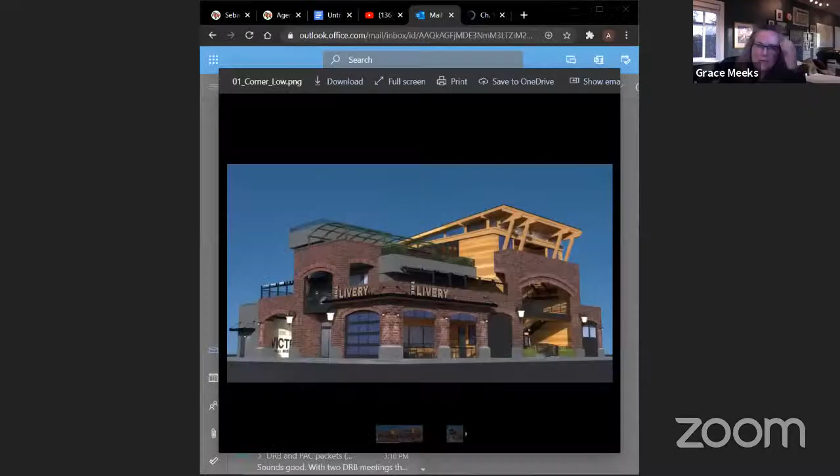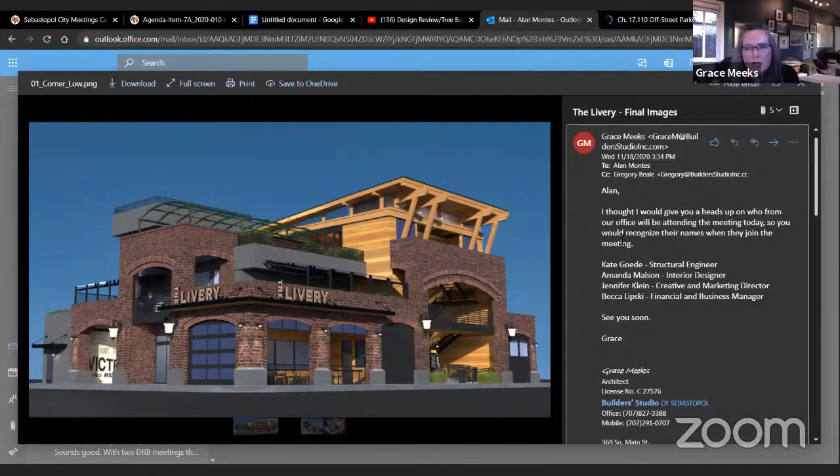Even Alan referred to it in his report. The existing massing, as you know, is kind of horizontal and stagnant, and we really feel like what we've done is create a little more movement to it. We pull it upwards. With the brick, it moves up. With the very low slope, but sloped roof, we create a more dynamic building, something we feel is much more appealing. We feel like this redesign really integrates our new features and the existing features better than our last design.

You talked about entries, and we feel like we've really created identifiable entries. Our areas, the brick that moves up, that's identifying the entry. We feel like it really will invite people in.

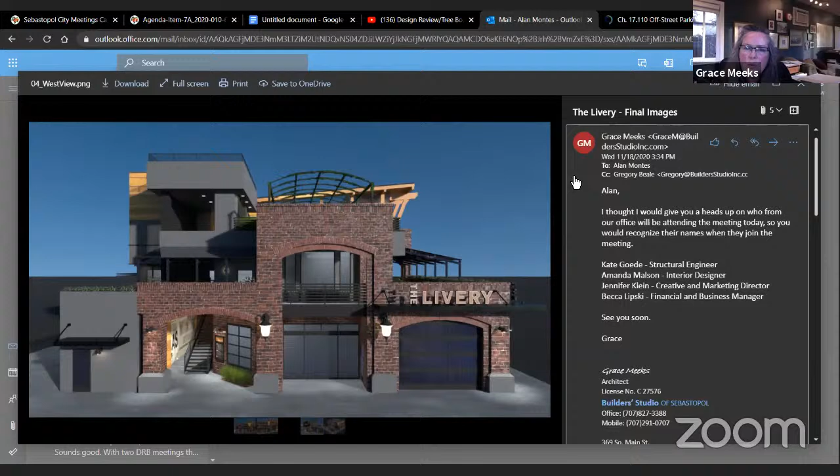You mentioned this corner, and we did not put our entries on the corner. We really feel that corner of this particular building can be very useful as community space, so people walking by will look into this porch area. They'll be able to see the people inside in the activity, and the people inside will be able to look out at the community and see it. But what we do feel strongly about is that this building creates a really strong corner and foundation for the block and for the city.

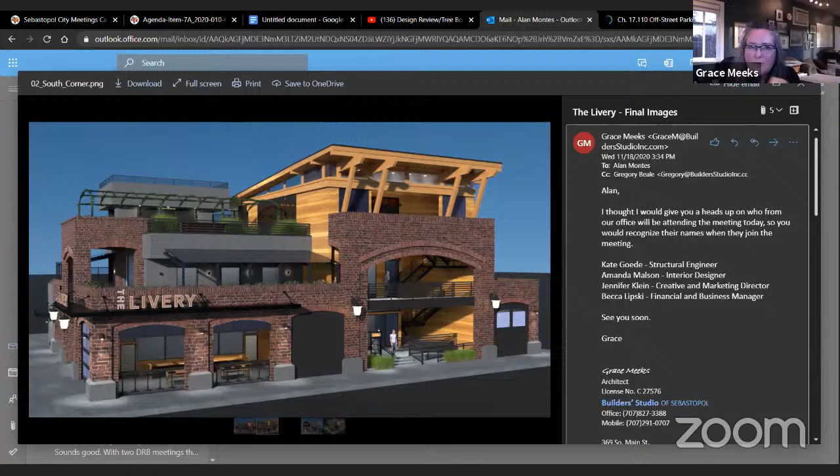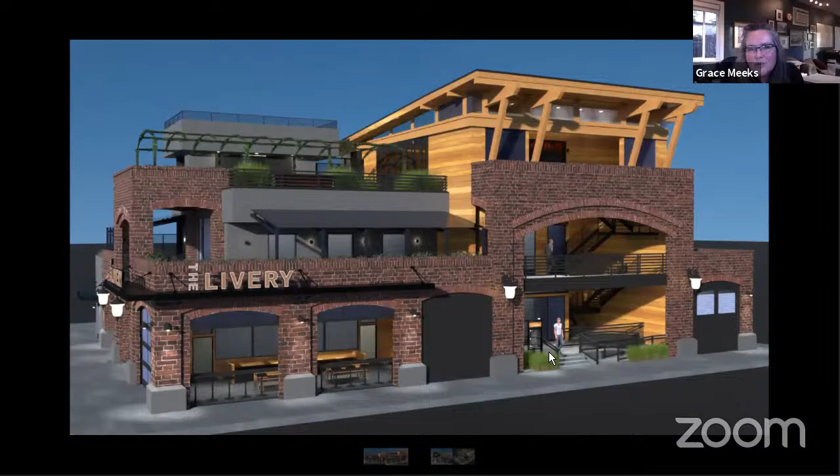Now we feel like we've done a blending of the past and the present and the future. As Alan said, and as you saw in your drawings, we uncovered this photo from the late 1800s of this original building, and it really became an inspiration for us. As you know, because of the name of the building and the floor names, it really was an inspiration for our marketing team as well, and it helped us develop the two together.

So our height that has resulted from all of these configurations, the third floor, this tower change, we have a wider entry. We've also put a very low clearance between our existing structure and our new structure. On the drawings you saw that in the sections. We gave you a sheet, I think it was A6.2, that clearly defined what was keeping us. So we've got our existing structure, our new structure over it, and we've kept a very minimal distance there.

And then if you move to the front where our elevator clearance, the shaft clearance, the height on that third floor is, our structure is just above that. We feel our structure is important for the feature and the feel of the building. So we feel we have successfully kept this project within the height adjustments allowed.

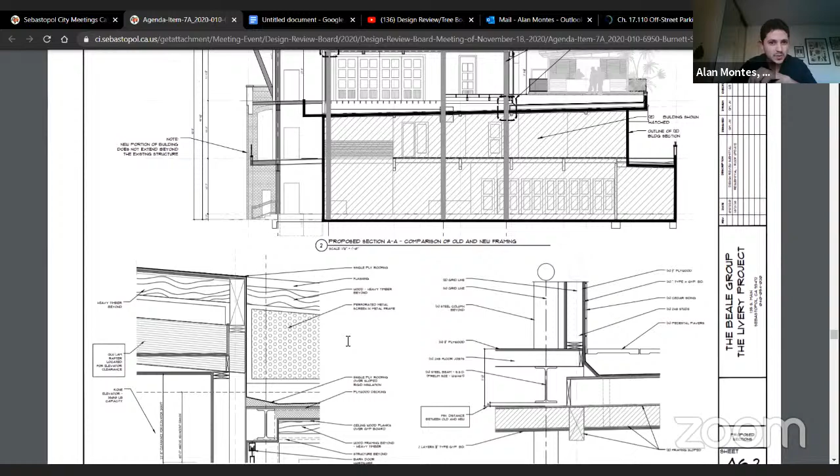Thank you, Alan. Are you hearing everything? Yeah, thank you. And it's number 3 that you wanted, or is it number 2? I can zoom in a bit. This is the page that offers some information.

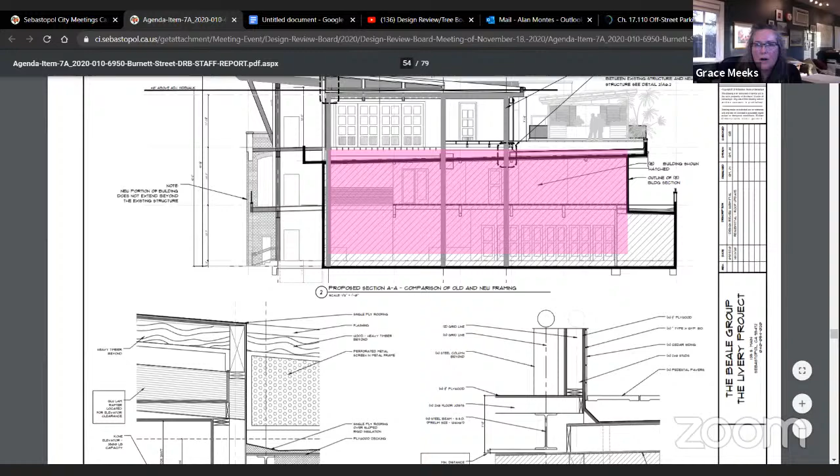We've got our existing right here, and this is the point where we are. This is that first point where our new and old structure kind of hit, and that's the detail that's below. The detail right in here is that detail. We've kept it very minimal on how close we are.

We had our structural engineer, she's here with us, go through a scenario and do some sizing for us. These are not final numbers as far as final sizing of our structure, because we've got a long way to go before the building permit, but we did get some preliminary sizing, so that's what this represents. On the left side you see our maximum height is 13.8 for our clearance, and we have this glulam tying in right above that. So that's kind of the components that set our building height.

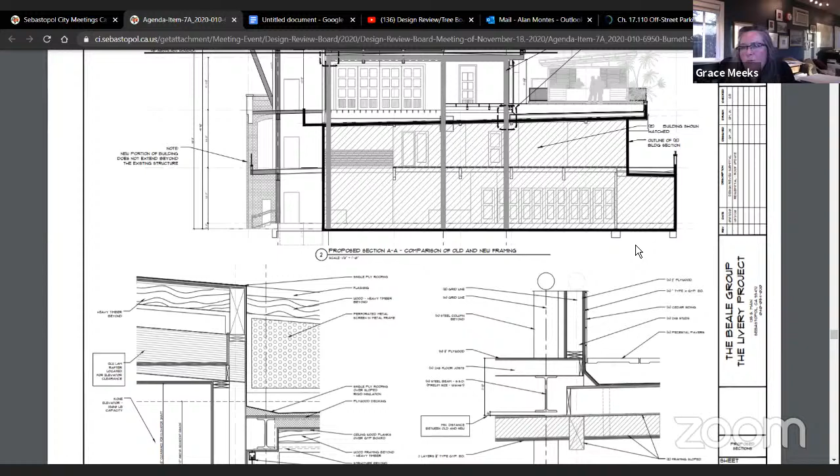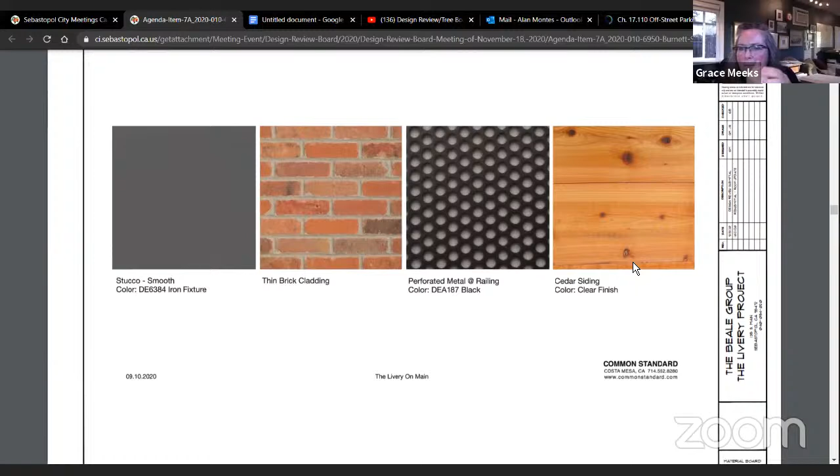Let me move on now real quickly to the materials and colors. Again Alan's mentioned all this, but I wanted to note, we heard you before at the beginning when you talked about how our stucco, we had a dark color, and it was on the base floor of the original one, and it was not right. That was our primary focus, and we totally understand. So we still have the stucco, and we still are using a dark color, but in this design it is very intentionally in the background.

So these are the images that were in progress, and the other images you received were the more final documents, the final images. But what we're now doing is using the stucco as the background, and it's the background for the other two materials, the cedar and the brick, which are much more textural and stand out.

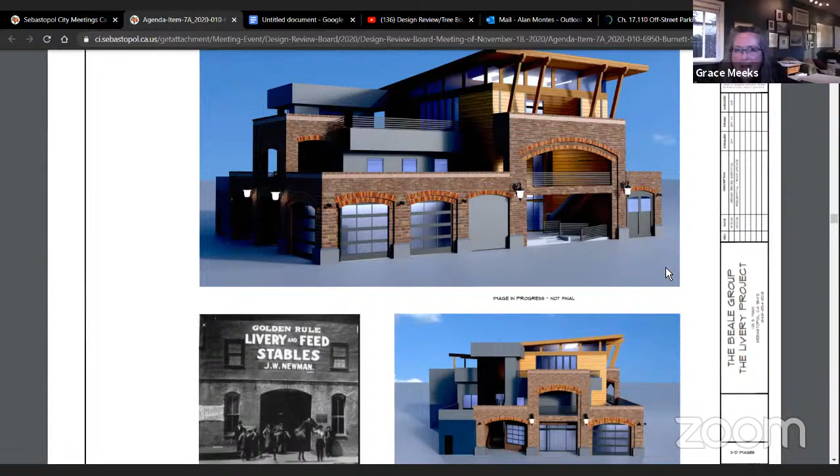So our brick, we feel, pays homage to the past and creates a really strong base. Our cedar siding is a mixed grain Western red cedar, and as you can see in these images, there's going to be some variation in the cedar, but nothing like what we showed before, which was mixed species and mixed size. This should be a lot more consistent, but still have that warm, inviting feeling.

As you see, the cedar comes down to the first floor, and the brick starts to move up. So as I said earlier, it's integrated — we feel like the materials are integrated. That's really all I was going to address.

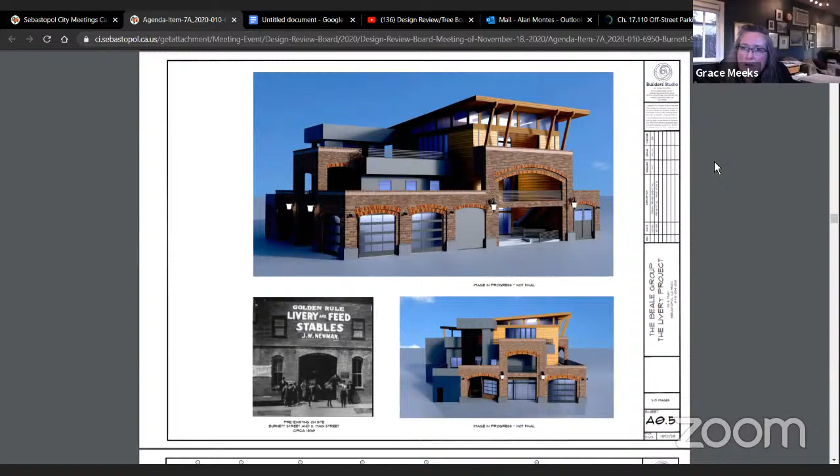The other things I wanted to clarify were our supplemental packages. You'll see on the other 3D drawings we sent that we have some of the signage shown that we are proposing, but that's for a later time as far as your comments go. Though I think you mentioned you might give us some pre-comments now, which would be great.

And the landscape on the 3D model — we're trying to just show you a sense of where it is, but we also feel like the building stands on its own.

The other thing I wanted to say before I end is that, although it wasn't mentioned, in the report there were comments about live entertainment. We just want to make sure you understand the success of this building is not dependent on live entertainment.

So with that, I don't have any other comments right now. I look forward to your comments, and we are all here to help answer questions if you have any. Thank you. Sounds good, thank you very much.

Any questions of our applicant?

I've got a few questions. I also just texted Christine, and she's going to join us in a couple minutes. Oh, sounds good — racing back to her office. Yeah.

I have a couple questions, a variety of them. In your brief, you talked about a former very successful business on this site. Is that the livery, or is there something more current you're referring to? I don't think of that building as having had a successful feel in the almost 20 years I've been here, so I was just curious what that was.

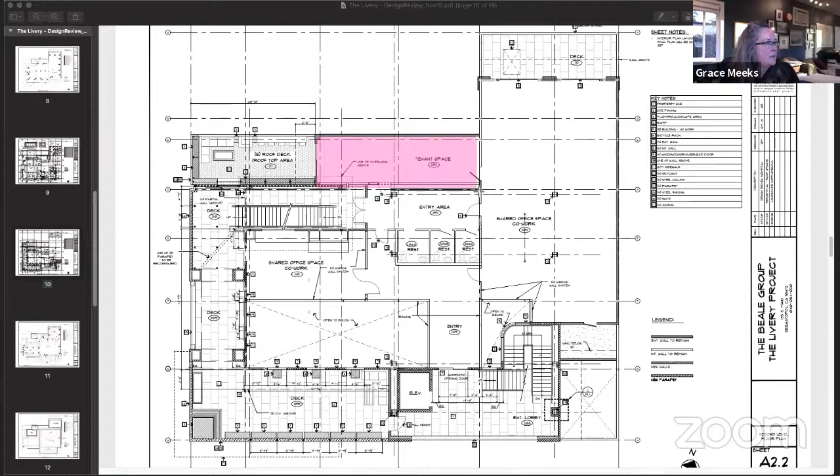And then on the top floor — let me clear this out and show you what we have up there. We anticipate that this area on the third floor will be kind of like a banquet hall that's part of a restaurant, or like when restaurants have large rooms — this would be it. It just happens to be upstairs.

And what we're showing is this small area here, which is kind of a makeshift bar area that could serve beverages, whether alcoholic or not. It's that kind of type — so there's not a lot of bar service, but that type of thing will probably be part of this. Sure.

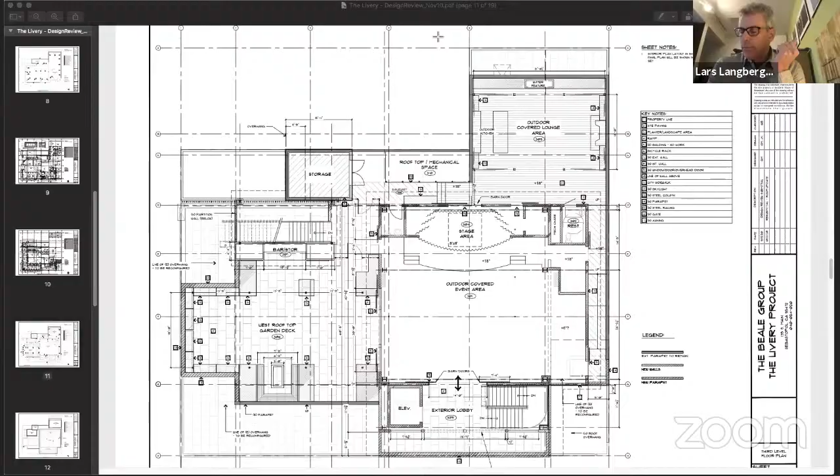Let me stop sharing. Did that answer your questions, Lars? Sure, that's fine. I'm just trying to understand some of the language you're using throughout the building programmatically.

So then you have a co-working space proposed upstairs. Is that like I would sign up for a certain amount of hours a month and go plug in? It's not for someone to just walk in with their coffee and sit down and work, or what's your sense of that? I'm going to let Jen or Becca take that question, to give a sense of what that might look like. Yeah, I could take that question.

Hi, my name is Jennifer Klein. The co-work would be a variety of options, anywhere from a monthly membership with dedicated desks for people to show up every day and work as an office, to day passes. Maybe somebody who buys food at the food hall can go up and use the co-work for a couple hours. So it'll be a variation from day passes to monthly passes to maybe permanent. And also the food related vendors throughout the building would be using that as their office space.

And the outdoor areas would be open to the public. Someone could get a cup of coffee downstairs and then come up to the outdoor patio on the second or third floor during the day. So is that completely public space? Could I walk in there, not buy anything from your food vendors, and go up to a deck just to enjoy the view? As of right now, yes, that's the current plan. We want it to be accessible for the community.

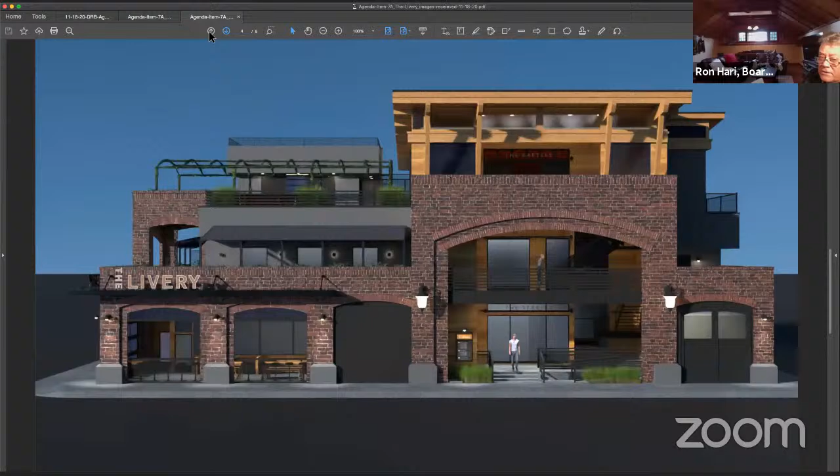The other question I have is on the other end of the building, in the corner next to the UPS building - what is that? Yes, in the corner, that is the UPS building. Is that got anything to do with you then? So that building is part of this property. The only thing we're going to do - and I apologize, we're not showing the windows - the windows and the door will stay exactly the same on the UPS building. We will paint it to match the colors and work with this, and we're going to update the awning.

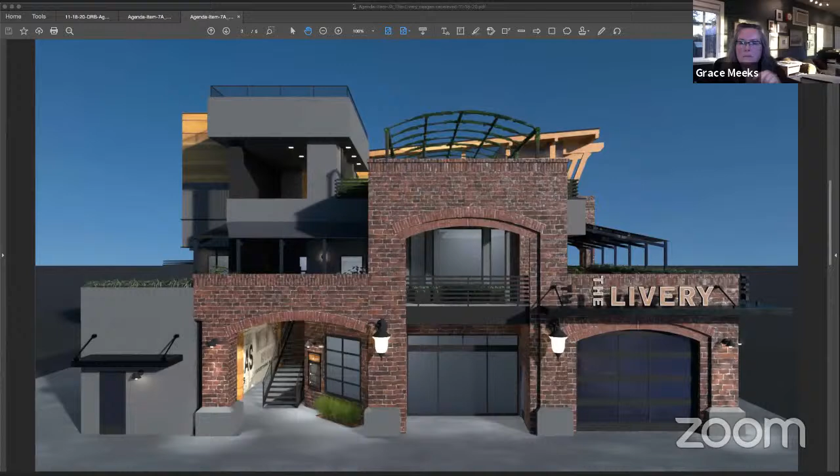Well, that has nothing - it's on the property, so the owners will own it, but will it still be another owner? It'll be a tenant within the building. So it won't have really anything to do with the current livery, right? No. Okay, that's fine. One thing that I really like here that you're doing is incorporating the history of Sebastopol into this building.

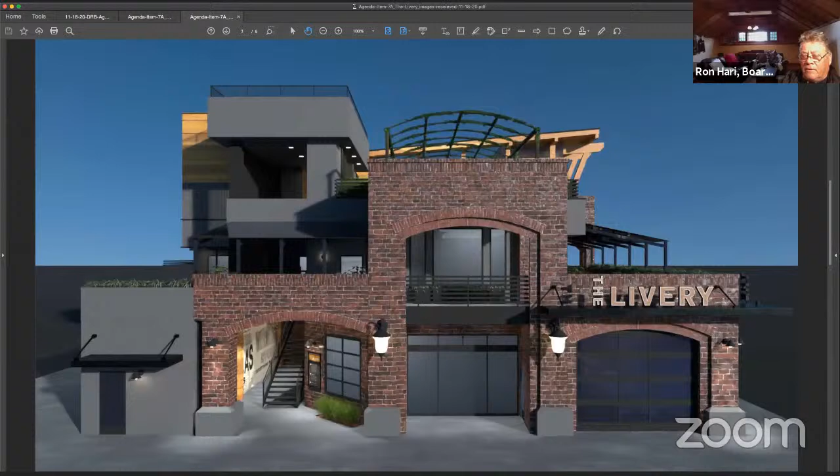They did that a little bit with the Barlow, but frankly, hardly anybody in this town has any idea why they named it the Barlow, which is part of the history. There's very little knowledge out there in town. And I would really hope that, besides the photograph, you can kind of display a little local history here. If you can dig up any other photographs or anything else of what it used to be, I think that's important for Sebastopol. Another thing would be the train history, but there's nothing besides the depot about that.

We don't really have much history in Sebastopol, developed into anything very much, with the exception of the Barlow. You probably don't know, but I own the Barlow house, and virtually nobody in this town knew the Barlows built it, and I bought it from the last Barlow. It's amazing how history gets lost in a small town like this.

And I'm really thrilled with the fact you're incorporating a little history. I love the design, by the way. Thank you. So anyway, all good for me. Thank you, sounds good. Thank you, Ron.

Christine, I see that you've joined us, but you are muted. Do you have any questions of our applicant? Christine, you should be able to unmute yourself now. There she is. Hey, Christine, am I unmuted? We can hear you. Yeah, I'm sorry that I'm entering late. That's right, we're glad you're here.

I'm gonna ask a question that you probably have already answered. The gray material that I'm seeing on the facades, what is that? Is that stucco?

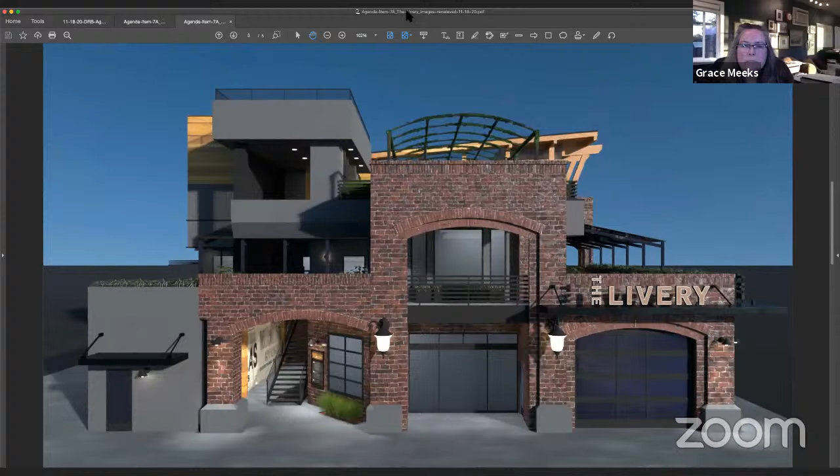Christine, this is Grace. On the top levels and on the second level, the gray is stucco. Just to clarify, on the base of the brick where we have the columns, all those things - that's still the concrete, and it will just be painted. That's the existing concrete, yes. Most of them - some of them are new to match the existing.

Okay, and then the other question I had was - I can do this - this structure here. I'm sorry, you probably answered these questions, but I just got in here late. Is this a metal? What is the material? Where are we talking at? Where are you looking, Christine? Okay, sorry, I appear to be scrolling onto it, but not for you. It's on the upper level, the like trellis kind of arching. Yeah, that.

It is a metal frame that is part of a trellis. What we are showing this for you is so that you understand how our landscape is going to be incorporated here. We're going to present our landscape, including that trellis and the plants and everything that will go on it, at a later date. That is a trellis, a metal frame, that plants will be draped through so it feels like you're in and under a garden, with plants all around you. In this image we're just giving you a sense that there will be vines and things growing on that trellis, so through at least half the year it should be really full, and during other parts you'll be able to see through.

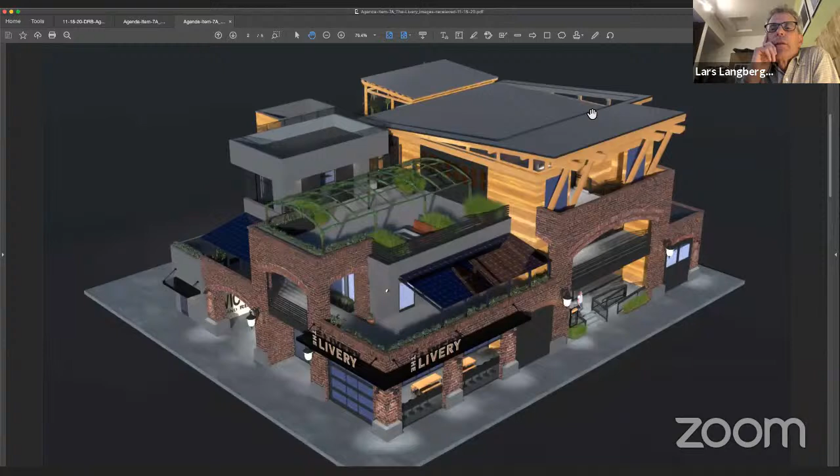You have two layers of the roof there. Is that part of trying to get under the height limit? That is correct. We've dropped it so we don't have the volume inside that enclosed area on the third floor. We've dropped the entire roof so the ceiling is flat inside, and that keeps us under that 40 feet. We've kept the edges up so we still create this floating roof, and that angle is extremely important to this design. But we've kept it flat, and that creates part of the parapet around the mechanical space.

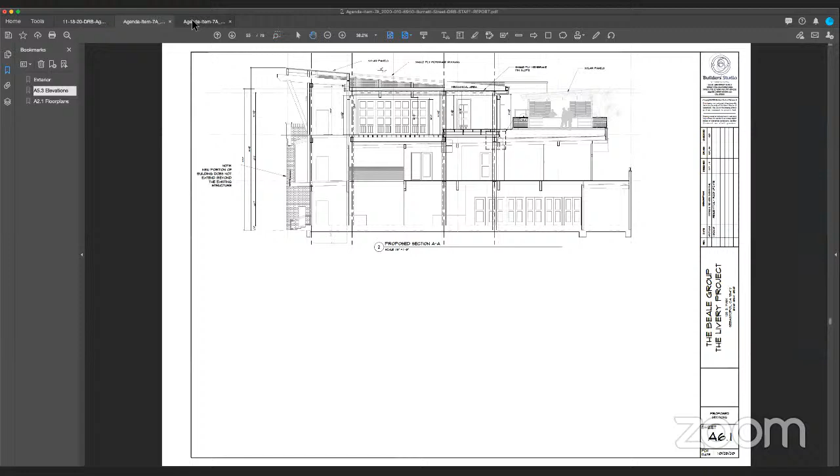Okay, so if you go back to the prior—not that, the SketchUp. Because this roof here, it looks like it's sloping from the back. Move your cursor to the left and down—is it actually flat in there? What's going on with that? It looks like it's sloping from that high point down to a low point, and then that other part is kind of hard to follow exactly what's happening there.

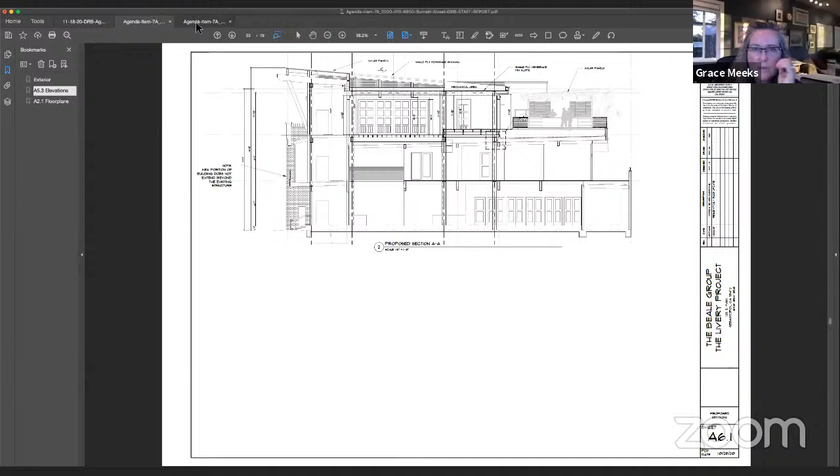I don't know if it's just an optical illusion in that section, but we can look at this section instead. The continuous slope goes from here down all the way back to this point. So the area you're referencing that's inside is basically flat. There's going to have to be a small slope just for drainage, at least a quarter inch per foot so water doesn't stand. But for all practical purposes it's flat, and that whole area is under the 40 feet requirement.

Okay, because it appears to have quite a bit of slope from where you've got your cursor, from that depiction right there. Let's go back to the section—it's not, it's flat. We can look at the section if we want to confirm that.

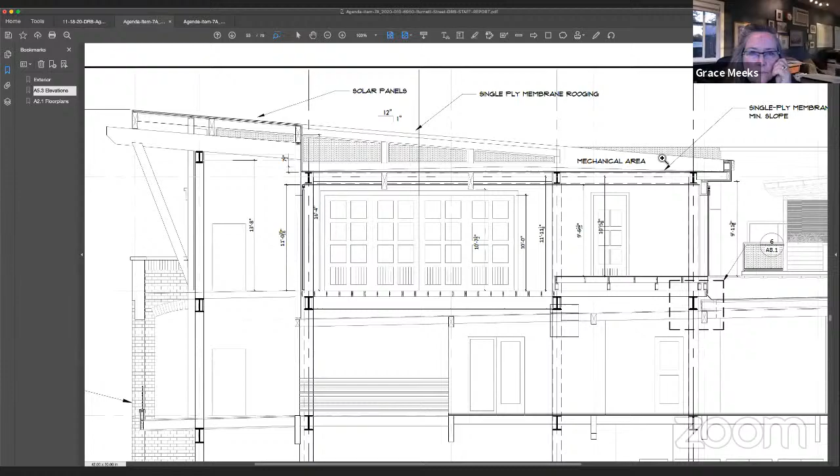Okay, one more quick question, and I apologize, you probably answered this, I just got delayed. So if you go back to—what do you want to call it—this, above the livery, what is that? Is that an awning? You've got the livery right there.

That is a trellis that will cover that area, and those are actually solar panels. Yes, this trellis is actually part of our landscape package, and we would love to have your comments on it. It will be part of the landscape package presented along with the exterior lighting and the signage package. We've just shown it all here so you really get a sense of how this building's going to come together. It's a metal frame and it will have solar panels on top, which gives us some protection below for additional seating and for comfort.

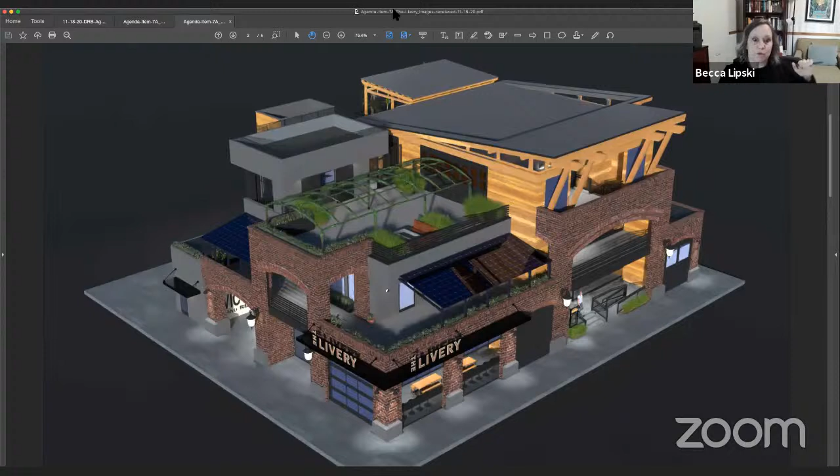Grace, you might want to mention, we're looking at the Lumos solar panels that are kind of see-through. They're a really lovely solar panel. Yes, it is a transparent panel. It's not the typical one that you would see up on top of a roof. It won't be the same one that's on top of this roof.

All right, so I'm not quite following what you're saying, but these two trellises are not part of this design review. You're saying you're submitting them later, but they're just drawn on here?

Go ahead, Alan. So the applicant is going to submit the landscape plan, lighting details, and signage as a separate deferred submittal. Right now these are just kind of references to show the bigger picture at this time, and those deferred submittals will return back to the board.

It's just that they seem like a fairly substantial part of the facade elevation on that corner to not be considered part of the review today, in my view.

Well, as far as we're concerned, this is Grace again. As far as we're concerned, we feel like the building stands on its own without these, and we feel like these are very complementary of the building and work with it. So this is how we want these to look, but we've just kind of had them as part of the landscape package.

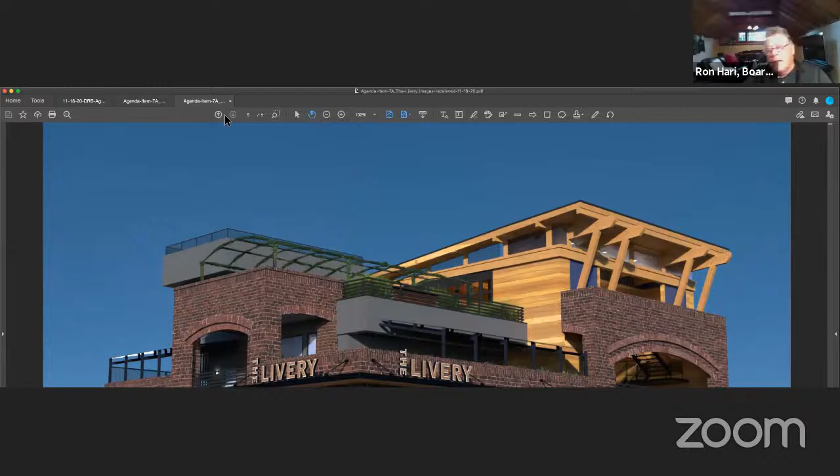Ron, what are your initial thoughts on this? What a great improvement. Wherever that inspiration came from, I like this building a lot. I really have no criticism whatsoever on this thing. I think it's a great improvement. I don't know what else I could say. I like the fact that you're trying to incorporate a little Sebastopol history into this. I'm not real crazy over the charcoal gray color, but that's okay with me if you think that works okay. I can't criticize this thing at all. I like it. All right, thank you very much.

All right, Christine, how about you? I'm going to hold back on my comments for a minute. Okay, go ahead, Lars, what do you think?

Well, I think it's a really exciting program. I think just the sense of what could be happening in this space once we're allowed to go into a space like this again, I think it'll be really lively, there'll be a lot going on. The different public spaces are really nice inside and especially outside up above. I think adding this music venue idea is pretty exciting. So programmatically, adding a workspace and having another way for people to be in there, I think is great. I think the alley section with the stair is much more inviting than it was before, and that feels nice.

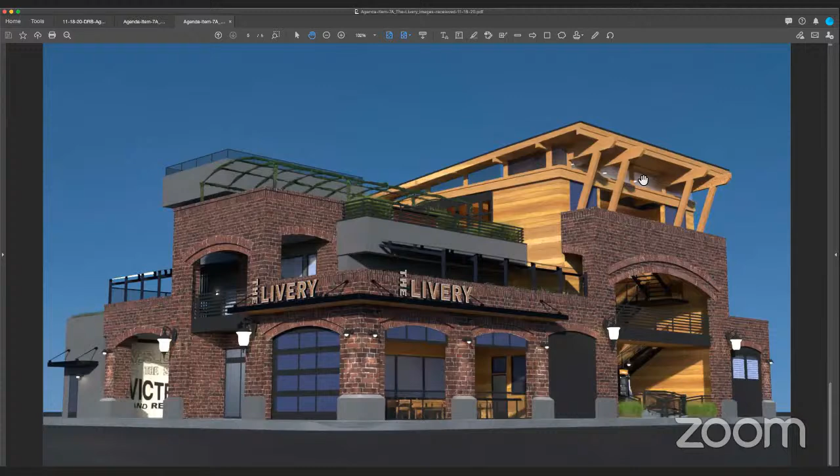I agree with Christine that it would look very different if these trellis structures weren't here, so I do think they're an integral part of it. I like the big wood soaring roof. I agree with Lars that it seems a little silly to drop a section of it just to meet a 15% requirement for the height. I'd rather see the big soaring roof on the interior, unless you need it for mechanical space. I don't know how we deal with that from a code standpoint and height limit standpoint, but it does seem like we're sort of dancing around the obvious.

One of the reasons I think the big wood soaring roof is working for me is that this continuation of the material inside really helps tie that together, as if this thing penetrates through, and the brick facade is almost kind of a remnant of a past time, which is fine with me.

I echo all the previous positive comments. I think this is going to be a great thing for downtown. I really like the direction it's gone. That is just sort of a glaringly blank wall right now, which I think everybody pointed out. If there's one thing I could pick to work on, it is this, because it is the piece that doesn't belong. So that's my feeling in a nutshell.

I think programmatically it's a very exciting place. The co-working on the second floor, the open spaces, the tenants all kind of scattered around. It's pretty cool. It's very cool.

I think you guys are starting to convince me the water tower doesn't fit either. It's a little wacky up there, isn't it? Yeah, looking at it more deeply, you guys are convincing me. I was just so thrilled with the whole concept, I was mainly concerned about the color at this particular time. I don't know what could be done, let's just call that the water tower, okay?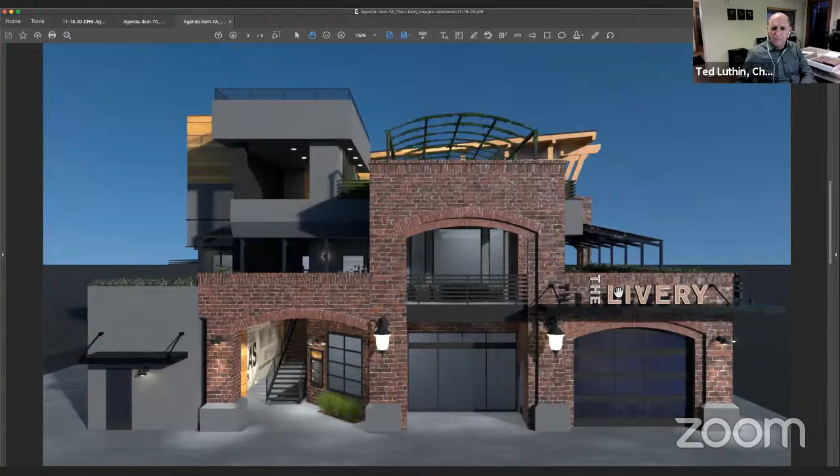So I guess that brings us to the question of where do we want to go with this. Do we want to continue this and encourage some additional exploration on a number of things? And the little concrete plinths—on one hand I agree, I'd love to see them go, but on the other hand they're not killing me, so if they have to stay, I can survive that.

They're killing me, Ted. They're killing Lars, and Christine's not a big fan. They're killing me too. Oh, they're killing me. All right, I'm outvoted.

I'll agree with Ted on this one, they don't bother me at all. I think they kind of tie it to the ground, so that doesn't bother me. The water tower does, but I'm sure not going to vote against this or suggest a major change on the bun feet, if you want to call them that.

Well, and then what about this whole roof height issue? I don't know if we want Alan to weigh in on that too, but it seems like we either say no, it's too high—it's not just a little elevated tower, cupola, etc., it's actually this giant roof, which to me is not in keeping with the spirit of the code. But there is that passage about if we like it aesthetically or think it's important, we could say yes. So unless the architects really want to have that drop roof, it doesn't seem necessary. I don't know, what should we do about that?

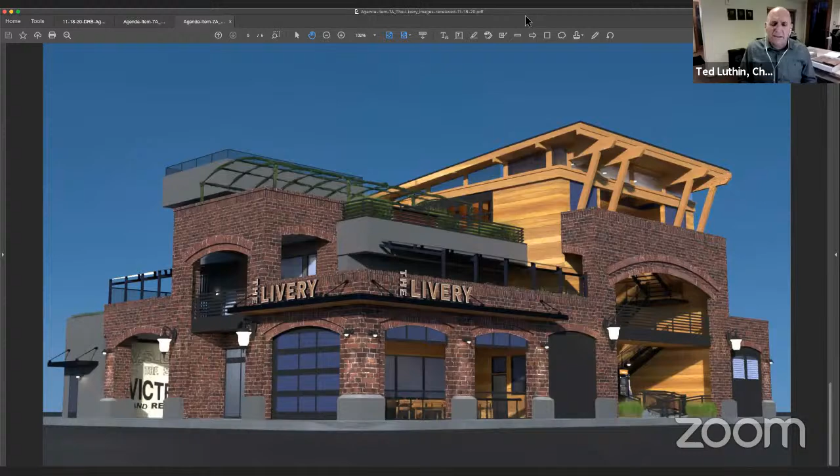Alan, what are your thoughts on that? So Carrie and I had discussed this when it first came in, because initially it was the full raised roof.

However, when we were reviewing it, we were reading the section over several times, and it's defined as being elements. So the thought was, if it's the entire roof that's going above the height limit, that's not really an element of the building when you're looking at it in terms of what the elements are or the features. So it became kind of this question of how do we make this work within the intent of the code. This was kind of the solution that the applicant had proposed, and we felt it met the spirit of that exception or that code section.

If they did want it to be the fully raised roof, we believe that would need a variance through the planning commission. It would. Okay.

Part of the concern was that, by issuing this 5 to 10 foot exception for the roof, that could create a precedent where it's now the entire roof level that's being increased. So that was just the thought process behind that.

Okay. Bless you. Thank you.

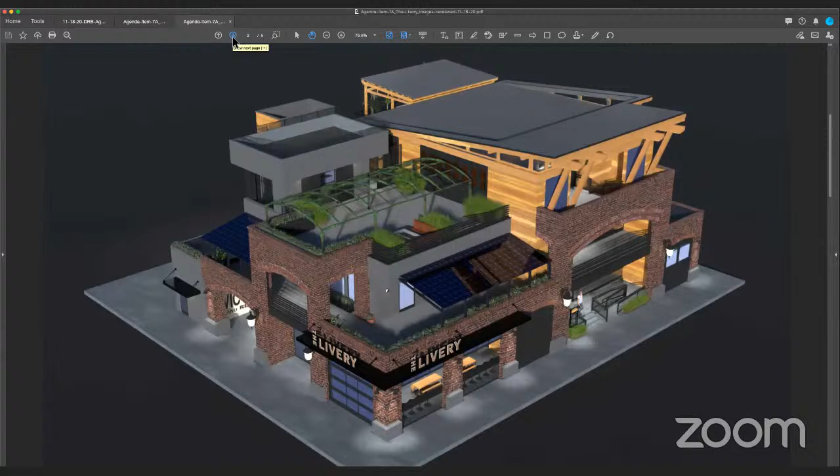Well, my feeling is I think we need to have another round with this. I think we have enough little tweaks to do on it, and it's worth spending the extra time because it's going to be such a substantial element downtown, and it's going in a very good direction. So I would personally like to see it continued one more time to work on these item areas that we've discussed. Yeah, and I support a continuance as well.

Is everybody else on board with that? I think I am. I think what we're all having a problem with is the water tower element of the structure.

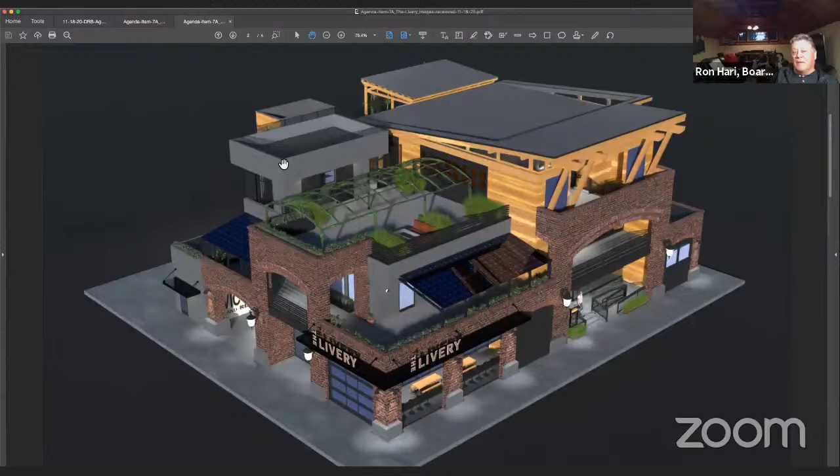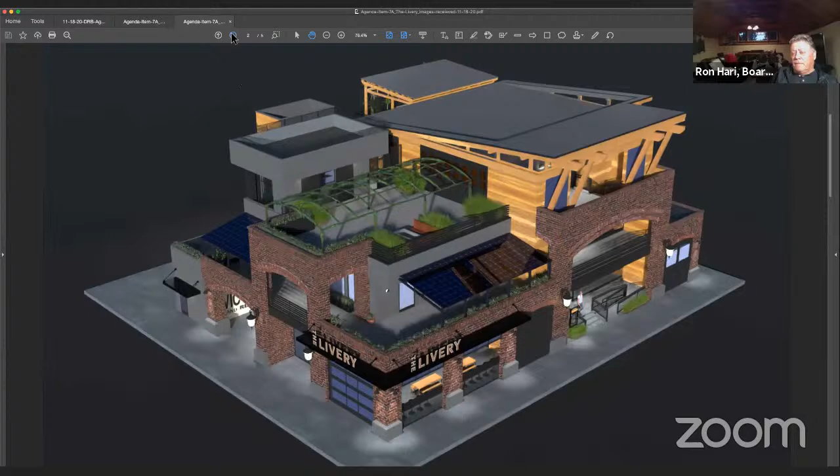Frankly, I like the bun feet myself, but I wouldn't change that. But the elevator, the water tower, for lack of a better word, let's see what they can do with that as a second thought without delaying this forever. I think that's the only real thing here that we should postpone this for, that particular element, not anything else. As far as the ceiling goes, I don't know. But let's deal strictly with the water tower.

Well, I think we can do more work on those plinths. Let's just let them resubmit it with these other suggestions or not. That's my feeling. Right. Yeah, they can take off.

I want to let you know that I want to approve this project. I'm like going towards wanting to do it. I just feel when you're working on design, and I've worked on enough design, the more you have a little bit of time to think about it and take in suggestions, you just improve it. I think it would be worth one more round to think about these things, everything that we suggested. Maybe you don't change anything else, maybe you do, but just absorb the information that we're presenting, see what you want to do with it. Let's just give it one more massaging round so that we can approve it at the next meeting. It's my feeling. Yeah, Lars?

I was just going to say we could then review and approve the landscape package and the trellises as part of that. Yeah. I think it's an important part of it. I think we need to be looking at those at the same time.

I agree. But I'm saying it again, I think it's a lovely project. I think you guys did a great job. So I think so too.

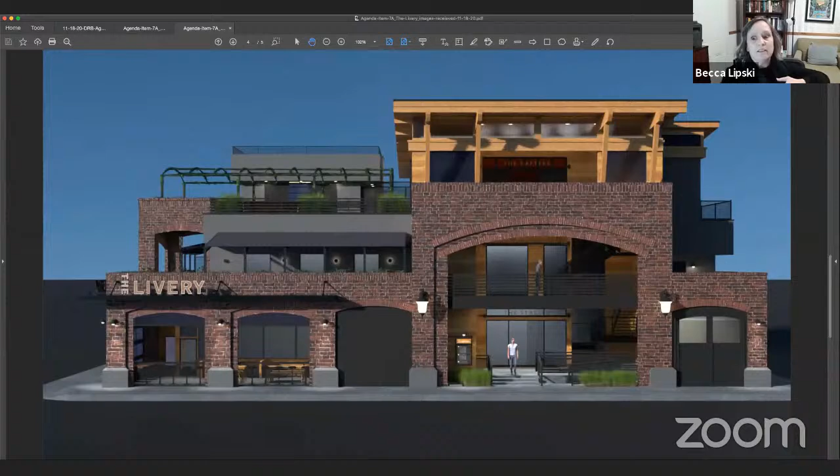Yeah. Can I say something? Is that appropriate? Sure. I'm not sure that, we've already delayed this project so long. And I'm curious if there's any possible way to do a conditional approval, because we can't keep going. We can't do this anymore. It's costing us a lot of money, and we're very happy to make changes, but delaying more than we need to is a real hardship for us. And I just want to put that out there.

All right. We appreciate that. I think I agree with her here. To delay this until we get the landscape and everything else is just going to cost them money and might jeopardize the entire project. We're going too far here as far as restrictions. We all like the building. The details can come later. There should be some thought on the water tower aspects, but let's not drag this out. That's not right. Okay. Thank you.

All right, I'm going to chime in on that one more time. This is the first time, I don't know about any delays. It's been a long time since we looked at the last version, but this is the first time we are seeing this. Right. Yeah, I don't think it's a delay. We're looking at a project, making comments on a project we have not seen before because this is so substantially different from the last one. As I said, I suggested let's give it one more tweak so that we can approve it. I appreciate the cost of construction and the whole design process, that's what I do for a living. But I'm saying this is the first time I'm seeing this design, so I'm not seeing this design review process as a delay.

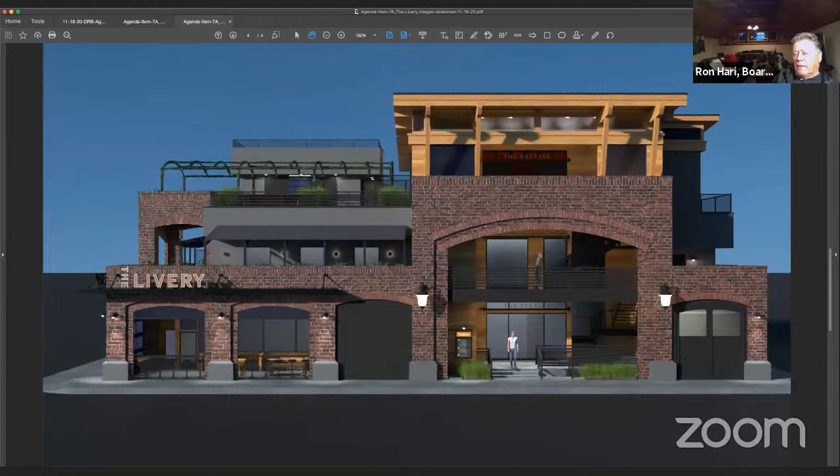I just don't want this to go on until next year, okay? Yeah, that's my concern. I'm all for another meeting, but I just don't want to throw bricks and stones at this thing. This is a local project, not CVS, deep pocket stuff. I think the water tower needs some help, but we can't delay this just for small things, okay?

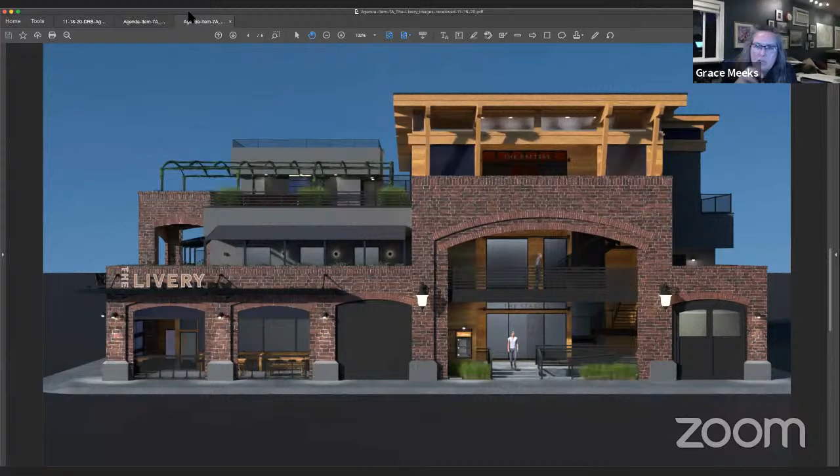Yeah, may I offer something? This is Grace. Is there a way that if we agree to, for instance, make the change in color on the base of these concrete pieces, let the majority of this be approved, and let the water tower come back as that element itself, presented and updated when the landscape comes through, so we can actually move forward in some areas but separate that piece, as we've kind of done with the trellises, and let that be presented to you again. So it's kind of split, since that's the piece you guys are focusing on, let everything else move forward.

Alan, that's probably a question for you. Is that possible? I think we could do that by adding a condition of approval saying the water tower, the landscape elements, and the lighting are returning as a deferred submittal. We can add another one saying the final details on the water tower element shall return to the board prior to issuance of a building permit.

I don't quite get that. I mean, it's not landscape, it's not lighting, it's not signage, it's a chunk of the building. So if I were the architect, and it was continued, I would walk away from this and start finalizing my building permit package for 85% of the building or whatever it is, and then present the last bit and put that into my package and submit it for permit. They're not going to submit for a building permit without this section of the building. So it's a very different element than signage or something like that.

So the other thing we could do, and this depends on Grace's schedule too, we could continue to a date certain. I think the next meeting is the 2nd, and I don't think there'd be enough time to put it on that agenda with Thanksgiving week in between. But we could put it on the December 16th meeting if Grace thinks she has enough time to make those adjustments. We will make them.

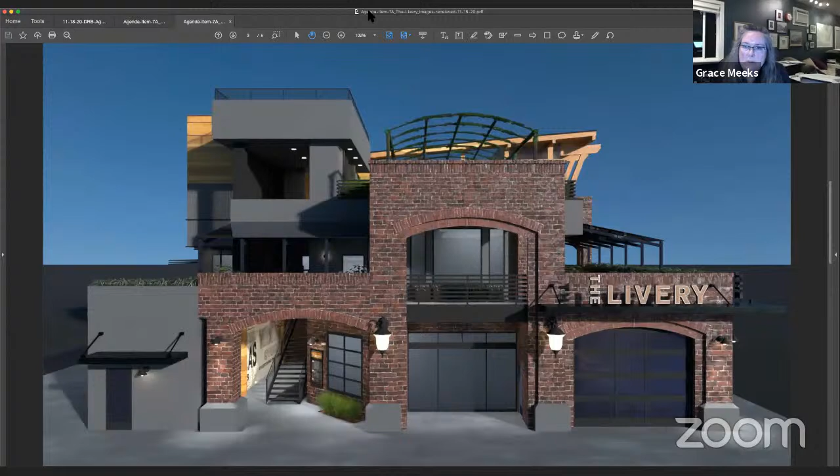Drawings and plans will be submitted to you by the 1st, which is basically two weeks from today, or two weeks from yesterday. That'd be amazing if you guys can do a special one for that. We'd appreciate it, and we will do everything to get that to you by then.

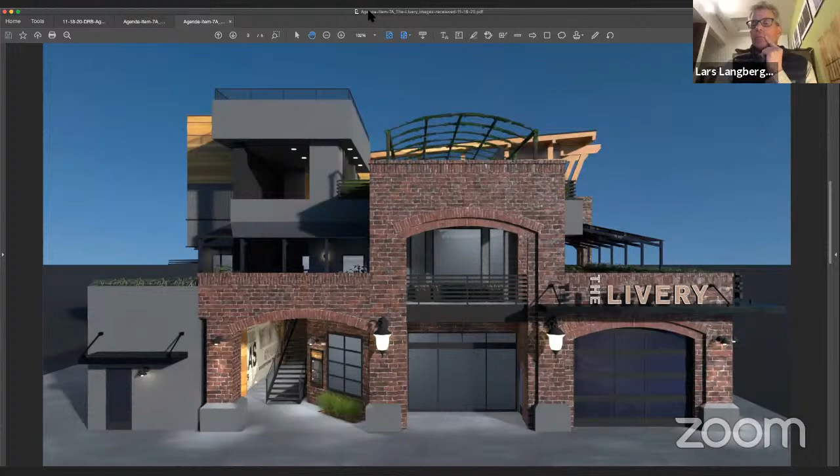Christine, Lars, Ron, are you up for a special meeting? Can we cancel the meeting on the 16th then? Let me take a quick look. I think that meeting's looking empty at this moment. I'm partly being facetious, but you guys have had a lot of special meetings these last two months. This project took many hours to review, and the one tomorrow has been taking lots of time too. So realistically, eyeballing it, I'm not making any promises, but it's pretty unlikely that we're going to have a meeting on December 16th.

So then, unless we continue items, we could do the 9th instead. That's fine, that works for me. All right, somebody want to craft a motion for continuance to date certain, the 9th?

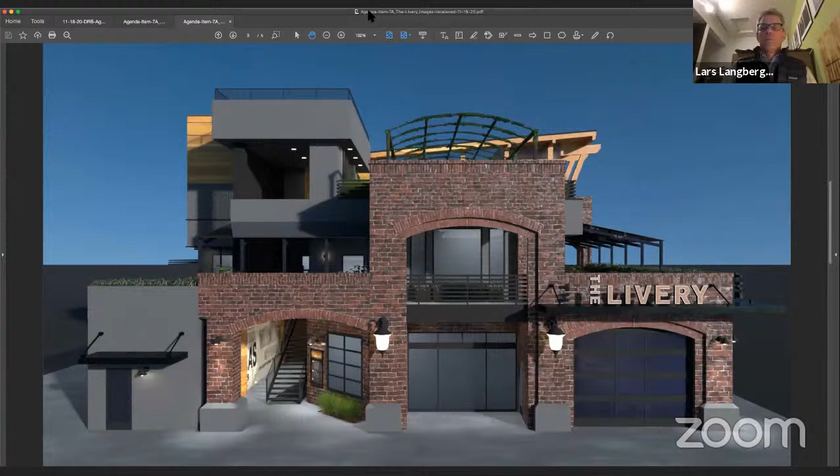Sure, I'll move that we continue this application specifically to look at the quote-unquote water tower element, and anything else the applicant wants to bring forward as changes. We can do that at that time as well.

Sounds good, we have a motion. How about a second? I'll second. Wait, I have some comments. Okay, how about we have discussion on the motion? Slow down — you do a second to the motion first, and then you have discussion, Chris. So we're discussing now, we're not voting yet. Okay, I'll second. So now we have a motion and a second. Now, discussion, Christine.

I would also like to include in this the consideration of those pilaster bases and the trellis elements that go with the landscaping, at least some more detail and definition about those.

It's part of this package. All right, so we're going to talk about the water tower, pilaster bases, and trellis elements. So we have essentially a friendly amendment — are you willing to add that to your motion? The trellises are part of a landscape package, so if the applicant wants to bring forward that package, I think we'll review it at that time too. I didn't want to put that in there because maybe they're not ready, since they were talking about it as a deferred submittal.